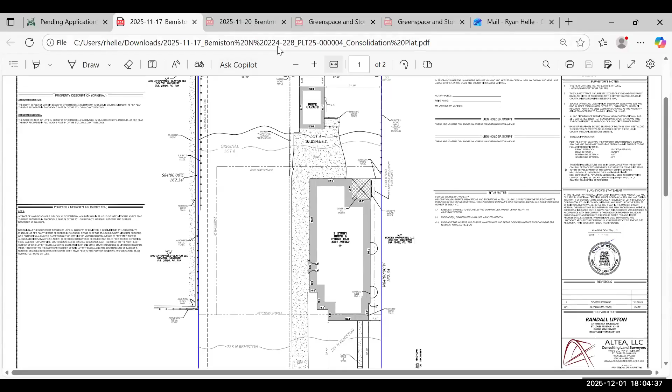What is the purpose of combining these two properties? So the client that lives at 228, they're tearing down that home and they plan on building a 4-car garage with some storage there. The point of it is to make more green space, have more grass, an area for them to have a little bit of a backyard. But the house on 228 is getting torn down.

The duplex is getting torn down, correct, at 228. So the reason why, if you look at the plat on the screen right now, we're not showing the current house is because we just went through the variance application, got approved, and now he's ready to move forward with the demo permit, which I'll be submitting in the next couple weeks once I get the plans together. In the meantime, we need to move forward with the lot consolidation plat because they cannot design the plans with the architect until we get the lot consolidation done.

So if the lot consolidation is approved, we would see a 4-car garage on 228. Correct, correct. There will be a breezeway, possibly attaching the house to the garage. They're still working out the details, but that will be submitted on the site plan I submit for the demo permit.

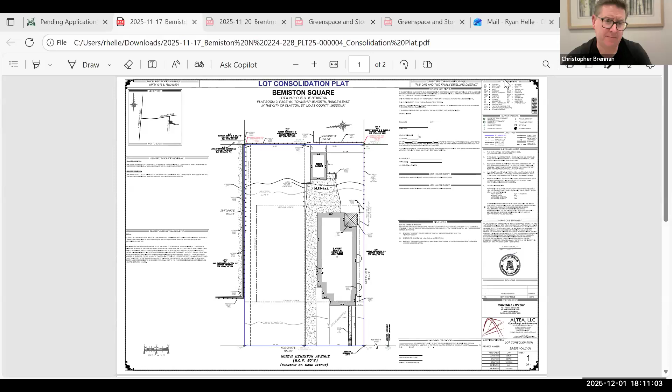Any hands up? No. And if it does help, approximately, we know the proposed garage is going to be 60 by 30 feet, if that helps. And it will be the same. Of course, we'll be going through architectural review board also, but it will be matching the house at 224. Okay, thank you.

Having driven up and down that street a lot, the properties to the south of 224 have been vacant for about 15 years or more. The east side of North Bemiston is beginning to look uninhabited right now if we allow the demolition on 228. I also have no objection to the lot consolidation, but I really have a lot of concern about what the land is to be used for. It seems like we are decreasing the amount of residential space and building non-residential space on a lot.

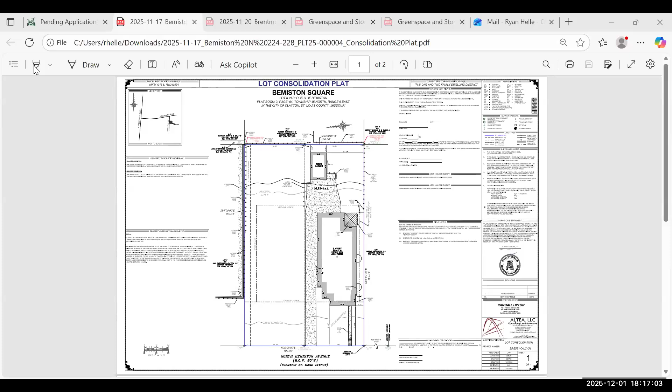Okay, we'll move on to item 2 in new business, number 3, Brentmoor Park. Do we know if the applicant is there? Yes. This is David Larson, landscape architect with Poynter. Okay, hold on, we'll start with the staff report.

The subject property is in the Brentmoor Park subdivision with frontage along Brentmoor Park to the north and Wydown Boulevard to the south. The applicant is proposing fencing in a secondary frontage along Wydown Boulevard. The fencing complies with the architectural review guidelines, will be screened by vegetation, and is like other fencing nearby along Wydown. Staff are of the opinion that the proposal will result in a minimal visual impact. Staff recommend approval as submitted.

David, do you have any further comments? No current comments, just waiting for questions. On the site plan on screen, I'm following the property line—does the property include part of the garage in the upper left corner? Yes, it's an interesting hybrid arrangement with the neighbor at 5 Brentmoor.

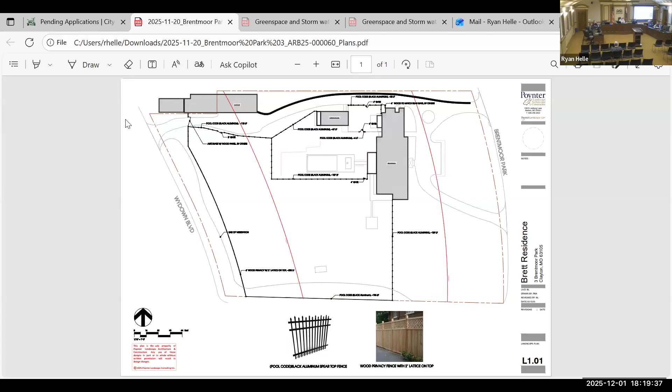We do have a staff recommendation to approve as submitted. I move to approve as submitted. Second. All in favor? Aye. Opposed? Okay, you're on the way. Thank you, David. Excellent. Thank you all.

We have a guest in the audience. Are you here for a specific item? Oh, we're coming to it. Okay, we will now go into the text amendment. It is a public hearing, so we will open the public hearing now.

I'm going to provide an overview of the stormwater regulations, some you'll recognize from previous presentations, and then I'll go into a little bit more detail about some of the sections we have proposed.

One of the popular topics that came out of the comprehensive plan, especially when talking with residents in our various residential neighborhoods outside of downtown, was stormwater runoff and lot coverage. One of the key results included in the implementation matrix from the comprehensive plan is to develop a coverage reduction program that identifies innovative ways to reduce the amount of impervious coverage and promotes green infrastructure. Under that are a number of other key results within our implementation plan that are directly or indirectly tied to stormwater runoff, stormwater management, and also character of area and lot coverage.

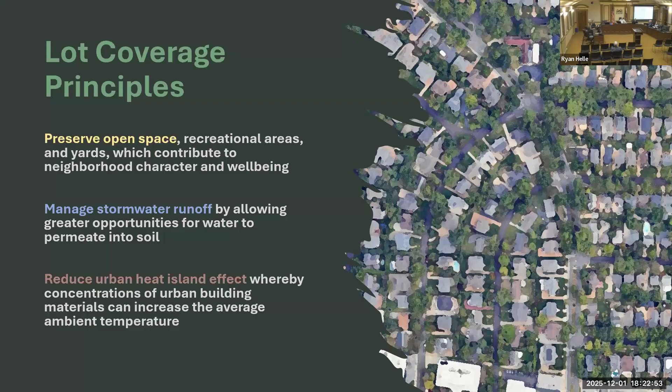I personally walk over the pedestrian bridge that cuts from Bemiston over Forest Park Parkway into the Polo neighborhood frequently, and it's almost immediate that you can feel on a summer day, once you get onto the south side of that bridge, how much cooler it is with the tree cover. So keeping those principles in mind, we took a look at what's happening in terms of development in our residential neighborhoods now.

Looking at the development patterns, we see pretty consistently that new construction is going up to as much coverage as they can, and aligning with that are new developments that really maximize the actual footprint, the square footage of the house. Rather than before, where some of our lots with older homes and subdivisions might still have higher lot coverage overall, there's a lot more dedicated to patios, driveways, decks, and other features.

Whereas now we're seeing most of the coverage on a lot is actually the footprint of the home. We're seeing a lot of directing of runoff into dry wells or pop-up emitters, as opposed to just having downspouts at the corners of your homes. Now people are intentionally collecting water and letting that go at very specific points. A lot of stormwater management really comes down to that math equation and whether it all works out mathematically, rather than intentional stormwater management going back to those principles of natural features.

So residents, during our comprehensive plan and otherwise, we have a lot of discussion with residents, with developers, with different people involved in creating the built environment. And we heard a lot of concern from residents about flooding. They're not only concerned about the actual loss of those homes and what's being built in their place, but also what the runoff is doing.

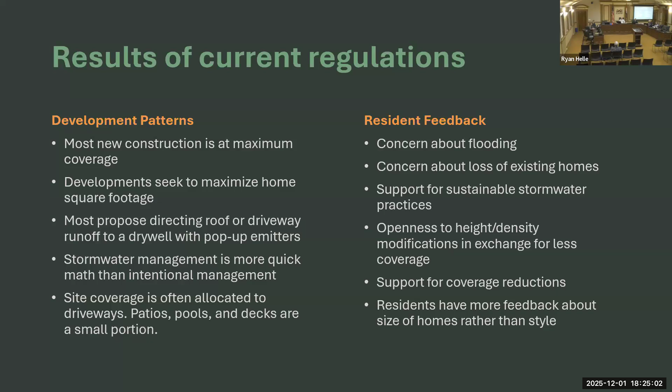There's a lot of support through the comprehensive plan for more sustainable practices. How can we promote some of these other technologies that are available to people? Overall, there was support for a general reduction in the amount of coverage you'd see on lots moving forward. Some of this resident feedback ties into other elements we're reviewing right now with neighborhood character, when we think about the size of homes, heights, setbacks, and other things that will come in following text amendments.

So our initial conclusions, looking across the general feedback across the city as well as diving into what's happening in different neighborhoods, are really that the code is not able to successfully tackle impervious coverage in terms of stormwater and green space all within one code anymore. New technology, materials, permeable pavers, the use of dry wells, all these other systems allow people to isolate that stormwater potential from lot coverage and address it without really addressing the natural vegetation and green space character impacts of those decisions and employing those tools.

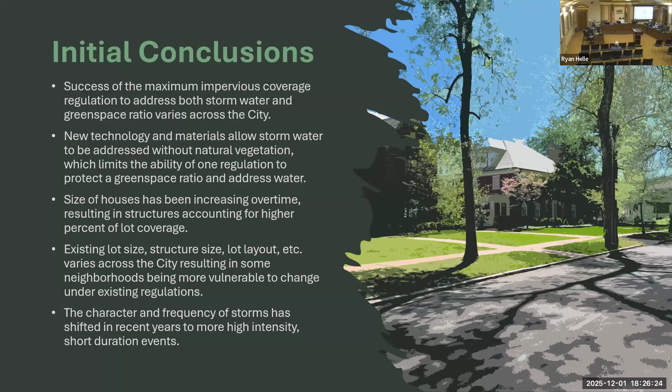We've also seen that some of this can result in areas potentially being more vulnerable to change as we look at those development patterns. On top of that, we know the frequency of storms has changed - the frequency of high intensity storms is increasing, and according to NOAA, the overall volume of precipitation in our wet seasons and spring is increasing. So the impact of those storm events, and the way we treat our smaller sites in single family residential neighborhoods, is greater.

So how are we going to address this? Really at the heart of what we've proposed in this text amendment is separating out stormwater regulations and green space. The first thing we're doing is largely a narrative shift: in our residential zoning districts, we're moving from the current regulation, which tells us a maximum lot coverage, to a minimum green space requirement. This lets us clearly define what green space is, tie that to the development and character we want to see, and have that definition. Then separately, we'll address stormwater runoff.

The goal here, we accomplish in a couple different ways. One, we're increasing that minimum green space - if we just flip the percentage from what it is right now with lot coverage, we'd be requiring more green space for most of our residential properties. As you can see on the screen, there are a few multifamily zoning districts where that minimum green space isn't really changing from what the code requires now, but the existing zoning districts are already providing less green space than required, so we're still trying to move up there. We're adding a hardscape mitigation incentive, which I'll go into more on the following slide, of 2%. We're also revising some of our urban design districts and how those incentives work with the placement of garages, and revising our definitions.

To get to the green space minimums that we've recommended, we started with an analysis of all of our zoning districts. Through the comprehensive plan, we have data that provides us with an estimate of the existing lot coverage of every parcel in the city. This was created using aerial data and LiDAR, so it is an estimate, not perfect, but it covers all of the parcels. We were able to analyze all of our different zoning districts.

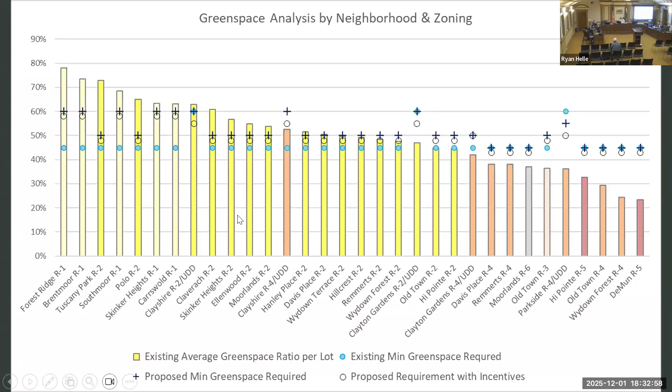Well, this data is using LiDAR and also using our existing lot coverage definition, which provides a little bit more flexibility for people who have pools, decks, and other features like that. So here in the new definition of green space, it's much more restrictive in terms of what we're going to count towards that minimum green space, being that vegetated area or the area open to the sky above.

And then we've introduced the hardscape mitigation feature. This is one that we really had a lot of discussions about with one of our on-call engineering consultants, because it's trying to address that desire that came out of the comprehensive plan for promoting sustainable practices. However, we didn't want to go too far because there's been such an emphasis on the stormwater impacts. So we didn't want to create a hardscape mitigation that fell back into that same pattern of just addressing potential stormwater impacts and became kind of an easy out.

So we were very specific when we have this definition for hardscape mitigation feature to call out addressing more than just stormwater, and call out specific types of systems that would qualify for mitigation. These are systems that are going to provide more than just stormwater benefits.

With permeable pavers and those systems, they've been shown to help with stormwater on a small scale, but they also hold less heat oftentimes than a traditional driveway material, so they can work towards both the urban heat island effect and stormwater runoff. When we start adding rain gardens, those can add to the biodiversity and habitat of our community, and water runoff. So we tried to choose some systems that are appropriate for our residential neighborhoods and likely to be maintained moving forward, but also cover multiple aspects of why we have green space regulations in residential districts.

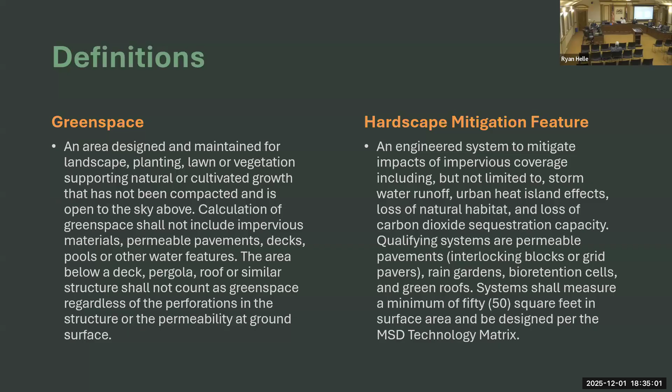So then what do we want to address with our stormwater? Now we have our green space kind of set up - what do we want to do with stormwater? We're really trying to address our peak flow rate, which is the speed of the water as it leaves the site. And the more impervious coverage you have, the faster that water is going to pick up pace as it runs along to leave the site.

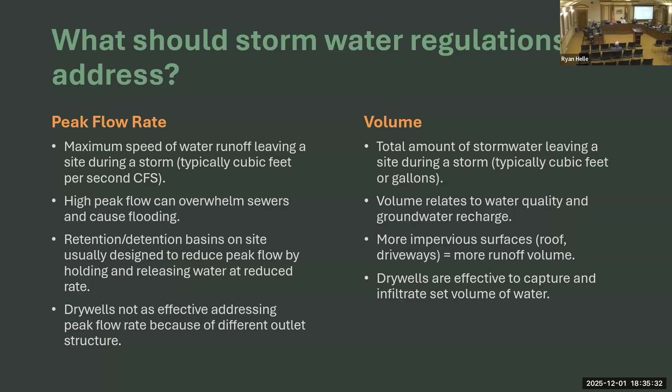And then we also have the volume, the overall amount of water that is being created, that will eventually leave the site. So with our stormwater regulations, it really comes down to trying to maintain or reduce the volume of runoff and manage our overland flow paths to reduce the impacts of that peak flow rate.

One of the things we found looking through our development patterns and talking to a lot of different residents who may have lived in their neighborhoods for a long period of time, there's a lot of discussion about - well, yes, the new houses might be bigger, they might look different, but they're also resulting, in some cases, in very different overland flow patterns. So water is now leaving from a corner of a site that it didn't used to.

For the last 20 years, the neighbor owned the house. They were used to water from a neighboring property coming from the south corner, but then now all of a sudden they have water coming from the north. So that change in what the overland flow pattern is - even though maybe it's not a really substantial amount of water - it's coming from a new spot, and so it has different impacts.

So we're going to try to address that in a few different ways. The biggest one is that we're revising our differential runoff calculation from the 15-year, 20-minute storm event to a 100-year, 60-minute storm event. I'll show how this actually works out in terms of numbers in a couple of slides. But really the idea here is that we are looking at storms that have a lower percent chance in a given year of occurring, but we're starting to see those types of storms happen more often. So we're trying to evaluate for that 60-minute period, which impacts the volume.

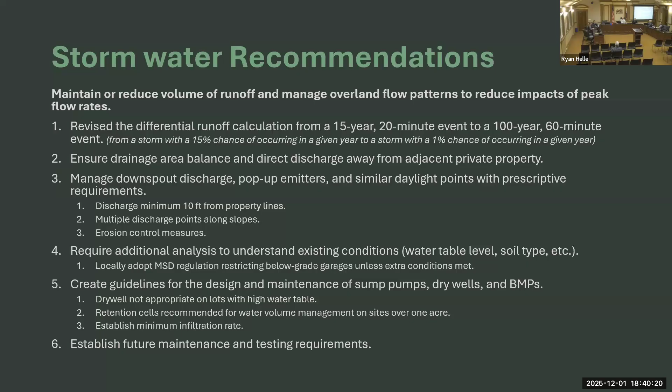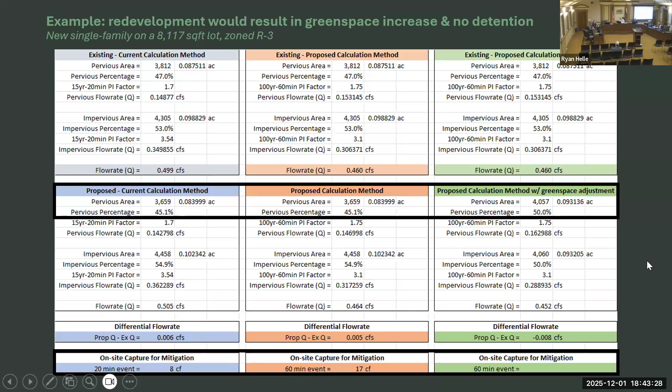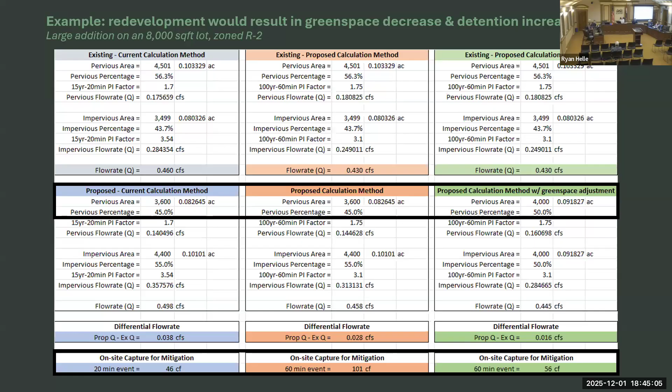So this was trying to show you guys an example of how the numbers work out, so that although we separated out our green space and our stormwater requirements, they still really work together to address these issues on single family and multifamily lots in a way that protects our neighborhoods but also doesn't become overly burdensome.

Questions? Of course. Yeah.

Well, the first thing I wanted to say was thank you for getting this to us before Thanksgiving, because it was quite a bit of reading to get through. But I must say, the narratives were written in a very friendly way that some of us lay people could probably understand better. I think also the few graphics and photographs that were in there really helped. I hope as we go further, we'll have more graphic representations in all of our building codes.

One thing I noticed going through all the different zoning codes was that the purpose and intent seemed to repeat, changing sometimes by a certain percentage in various places. But I saw a process, as you were just showing us, Ryan, in the examples, so I think that really helped. But of course, there are always some questions.

The incentives for rear, side, or detached garages - currently we have a 5% reduction, but at times I think I'm seeing a 2% reduction in there. Have I misread something? The hardscape mitigation feature incentive is proposed at 2%. Within our existing urban design districts, that's where there's a 5% based on your garage location. Oh, only in the urban design district? Correct.